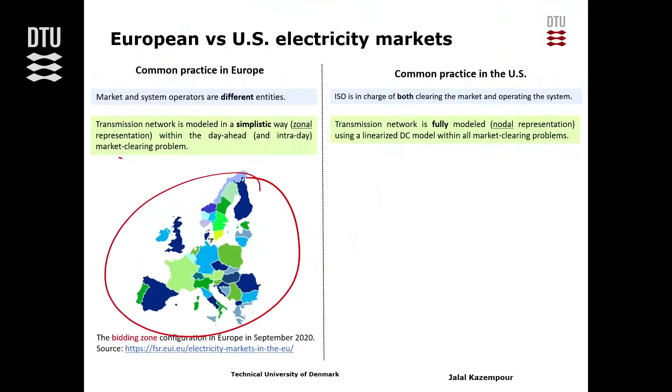So in Central Western Europe, including Germany and neighboring countries, we moved beyond ATC constraints. We try to represent the internal zonal transmission constraints within the zones through the flow-based method. And it's going to happen also in Nord Pool, in Nordic countries, starting from the coming January.

In Europe, since the ISO and TSO, market operator and TSO, are separate entities, the market operator clears the energy market day ahead, while TSO clears the ancillary service capacity market. They are separate markets. So in case of Nord Pool, at least in Denmark, first we have the ancillary service capacity market, and then the energy market.

While in the US, we have one system operator, the ISO. So we have a joint market clearing for energy and reserve. That's a very fundamental difference.

Which one is more optimal? Not more - which one is optimal, which one is suboptimal? Depends. US is optimal in that case, because you make decisions at the same time.

Some of you also mentioned bidding. So always we say that in Europe we have complex bids, simple market clearing. What does it mean? In US, the first problem we solve when we clear the market, what's that?

Unit commitment. What type? Security constrained unit commitment. So what type of optimization problem is it? Mixed integer linear programming. So you have binaries. If you have binaries, what kind of problems do you have? Challenging ones - you cannot derive dual variables.

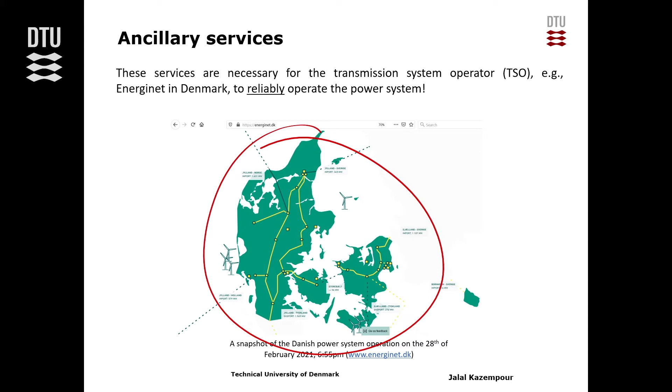So I said that who is clearing ancillary service markets in Europe? TSO, not Nord Pool, not market operators. For example, this is the balancing stage in Denmark that I captured from the Energinet website. So when we say ancillary services, what kind do we have?

So for what purposes do we have ancillary services? What type of services? Frequency-related ancillary services, exactly. Do we have only one type supporting frequency? We have 3. So what are they? Primary, secondary, tertiary, very good.

So then what other types of ancillary services do we have? Those services supporting voltage, and others? And else? Black start, yes. But you were talking about other things yesterday - what was that?

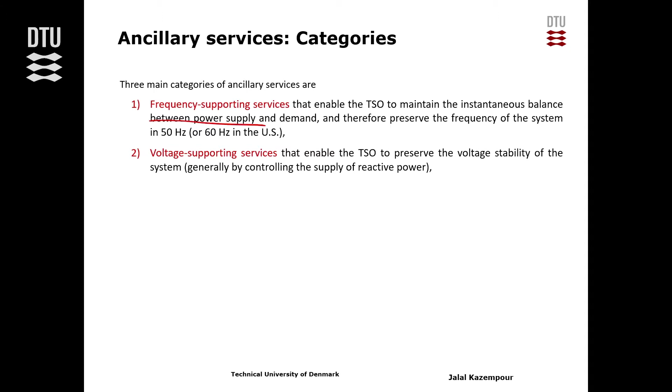Flexibility, ramping products, for instance. Yeah, but there's one more extra type of ancillary service that we need more of, by getting more and more wind and phasing out conventionals. Inertia - we need inertia, we need to have inertia markets. All of them are ancillary service markets, right? Very good. So we talked about frequency, voltage-related services, and black start.

So I've only talked about frequency-related services. When we talk about flexibility services, is it the same as ancillary services or not? They could be different.

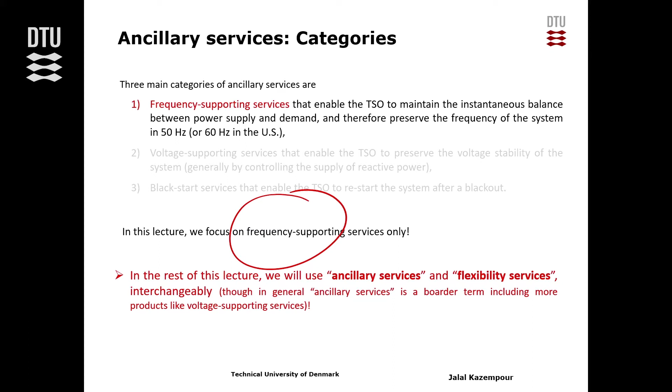So why do we do that? At the end of the day, we try to collect them and make them flexibility services and sell them to the TSO. Otherwise there's no reason to work on demand response, local energy systems, or energy communities. One of the big reasons is to capture and produce the flexibility services that we need.

So we are going to produce flexibility services. The big client, not the only one, but the big client of flexibility services is TSOs. And TSO needs frequency-related services. What kind of services? Primary, secondary, tertiary. I'm going to talk a bit in the European context.

Let's say a disturbance happens and frequency drops. What do you do as a TSO? You start with the primary reserve. In Europe we call it FCR, Frequency Containment Reserve.

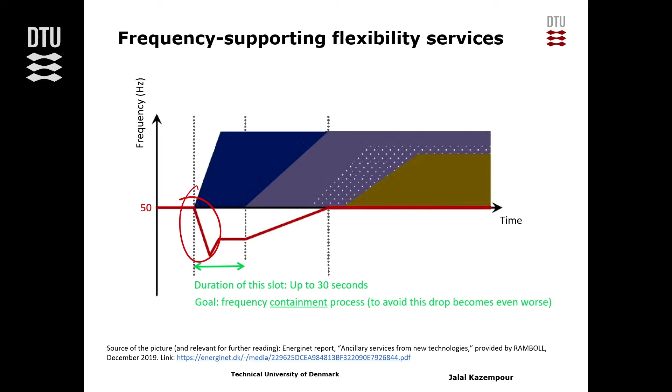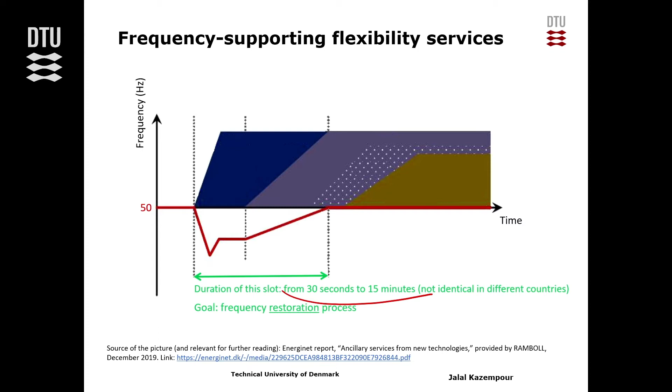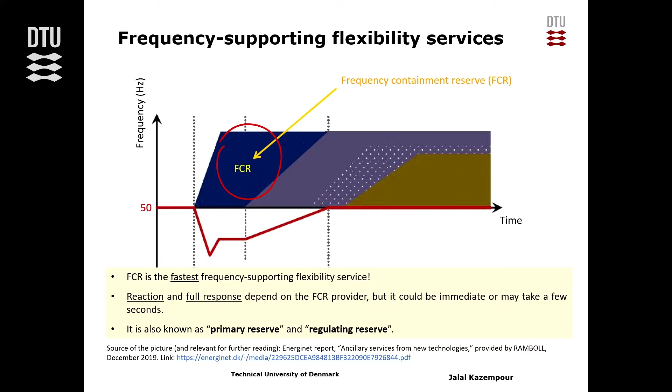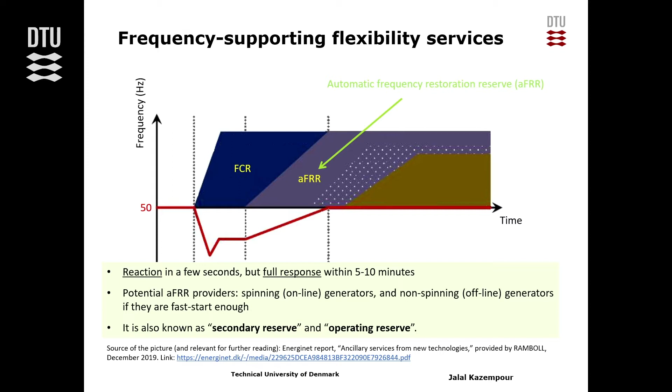Then it's AFRR, Automatic Frequency Restoration Reserve. It's slower than FCR, but it's the second line of our defending system against dropping frequency. And the third one is MFRR, which is way slower than FCR and AFRR.

So all of them help you restore frequency, but what makes them different is their speed - how fast they're activated and start working. FCR is super, super fast, while for MFRR, after you activate them, they start working after 30 minutes. So which one is more pricey, you can imagine?

FCR - you can imagine in the FCR market, the prices are higher. MFRR has a lower price. You can go on the Energinet website and check the prices. In terms of volume - the amount, the quantity that you trade in those markets - we have the FCR market, AFRR not necessarily markets yet, they are mostly bilateral, and MFRR we have markets. So in terms of quantity, which one has more?

By volume, you mean energy or capacity? Yeah, energy and the capacity also. AFRR - MFRR has way more capacity to trade.

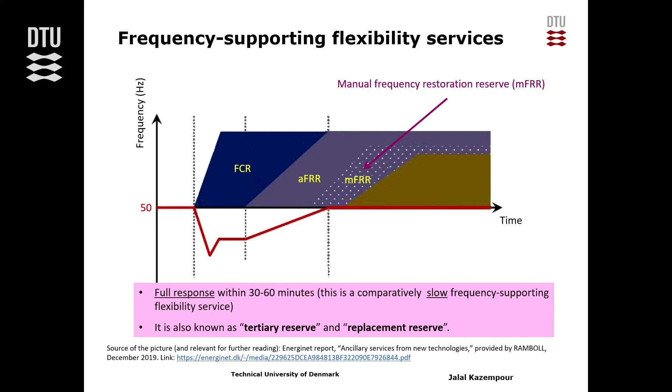Okay, so we talked about different markets. Let me check the time - this should be a preliminary talk. Now something specific about ancillary services in Denmark: we have two zones, DK1 and DK2.

DK1 is Jutland, the other side of Denmark. Here we are in DK2. And apparently we have different types of ancillary services in DK1 and DK2. In DK2 we have more types of ancillary services. Any idea why?

It's a less robust system. They are connected - so why? The whole European system is connected. They are not synchronous. They are connected, not necessarily synchronous. What does that mean?

DK2, which is here, is connected to the Nordic system. It's a smaller system and less stable, so you need more types of frequency ancillary services. While DK1 is connected to continental Europe, and you can imagine it's more stable.

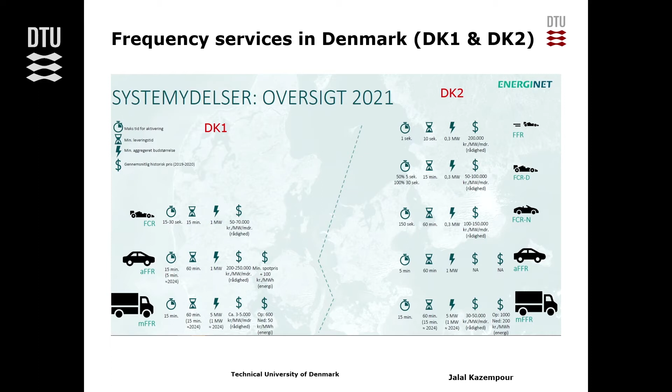You heard about market coupling in Europe, right? We have a common day-ahead market in Europe. Is it happening for ancillary services as well? Have you heard of that? No? Yes? So what's happening in Europe?

There are some incentives to build common ancillary service markets as well, the same for the whole Europe, pan-European markets. Why? Frequency is unique. If you have the same frequency products, you can sell between countries. It's way more than electricity. Why do you like to merge markets?

To have better allocation of resources. Imagine, for example, in Denmark you need some ancillary services, and in Germany we have it, and it's cheaper, but since they are not in the same market, we don't have access to them. So let's have a joint bigger market for better resource allocation, right? And that's what's happening. In day-ahead market, it happened in Europe. Now for balancing services, for flexible ancillary services, it's happening too.

So now we are going to have the Picasso market. It's an exchange platform for aFRR. And then also we are going to have the Mari market, a shared pan-European market for mFRR. So some stuff is happening. A few months ago, the Nordic countries, including Denmark, started a shared ancillary service market called the Nordic Balancing Model, NBM. And then the next stage is to join Mari and Picasso. Okay? Good.

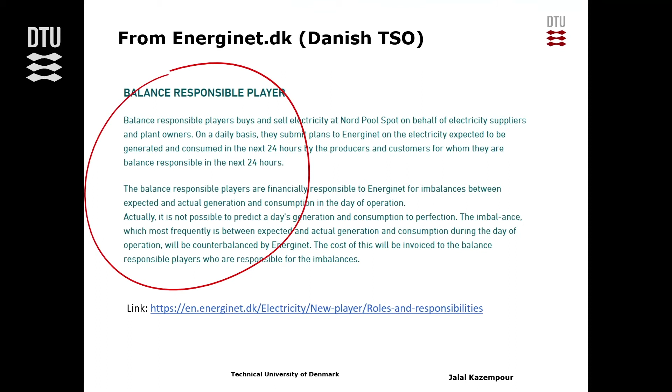Good. The definition of BRP on the Energinet website, we can go and check it out. Okay, aggregator. What is an aggregator?

Half of the posters downstairs are about energy communities or about demand response. Flora, you talked about demand response to us. So who is doing that? Who is collecting all flexibility services? Aggregator, flexibility aggregator, right? Is a flexibility aggregator a profit seeker? Should not be. So what does an aggregator do?

An aggregator - it's like a TSO. It collects smaller resources. Is any of you working with aggregators in your PhD projects? Yeah? Okay, what does an aggregator do? It just pools little pieces of flexibility together in order to be comparable to a conventional generator, and tries to produce and give products in the market.

Good. What kind of game are they playing? Like the games we played in our childhood - Tetris. There are small pieces of flexibility that they can get from heat pumps, from EVs, from thermostatically controlled loads, and then they put these small pieces together to build what? A big amount of flexibility services, but in different forms - FCR, mFRR mostly, right? They are trying to do that.

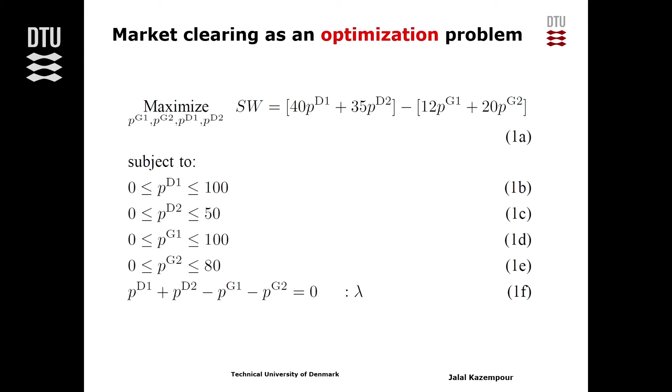I start from here because at the end of this part 2, I like to end up with the properties in market design that you have to be very careful about. That's why we are starting with this simple example. So we are trying to maximize social welfare, which is the utility of demands minus the cost of generators. And then we have consumption limits, generation limits, and power balance equality.

And here there is no network. What is the lambda? It's the dual variable. If you use uniform pricing, it gives you what? The price. Okay, very fast question: what is the dual variable?

Price - I know, mathematically here you define lambda to be your price. But what is dual variable if you talk with a mathematician? The sensitivity of the Lagrangian with respect to the generation. Oh, very good - sensitivity of the objective function, the Lagrangian, or on the right hand side. Simply you can say sensitivity of the objective function, the value of objective function with respect to any perturbation, any small change in that corresponding constraint at the optimal point.

And you can check the sensitivity on the right-hand side and left-hand side. You have to check both, not just the right-hand side. So this is exactly the case that the prices might be different. If the right-hand side sensitivity and left-hand side sensitivity are different, you may have multiple prices. But you have a unique price if the left-hand and right-hand side sensitivities are exactly the same.

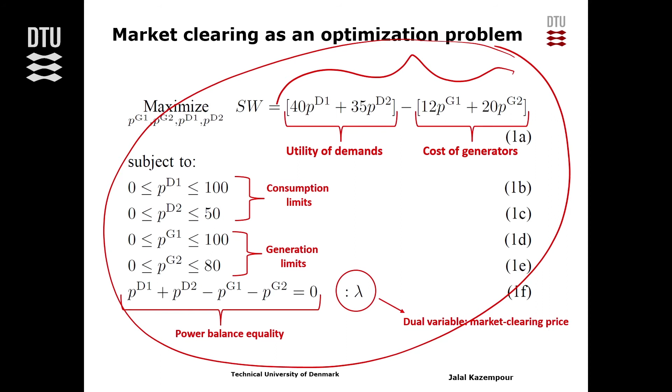Maybe given the price, the optimization problem for each generator yields the optimal solution. Fantastic, you have to make sure - this is the price I'm paying, $20 per megawatt hour. If they optimize internally and their solution is different than the market outcome, they will definitely deviate, at least in the long run. Okay very good, so Ogun, you said something good, so I'm passing this.

So this is what Ogun said - this is the profit maximization problem for each generator. What's the variable? The variable is the internal power dispatch level. And what's the lambda? The lambda is the announced system lambda. Is lambda a variable for the generator? No. So we are trying to see, for fixed lambda, what will be the best profit-maximizing schedule for generator G1. Do you agree?

So what is the objective function? Production times lambda price, minus the cost. So it's the profit, right? And the only internal constraint is the limit, the capacity limit. You agree? Okay, so can you think of the same for generator G2?

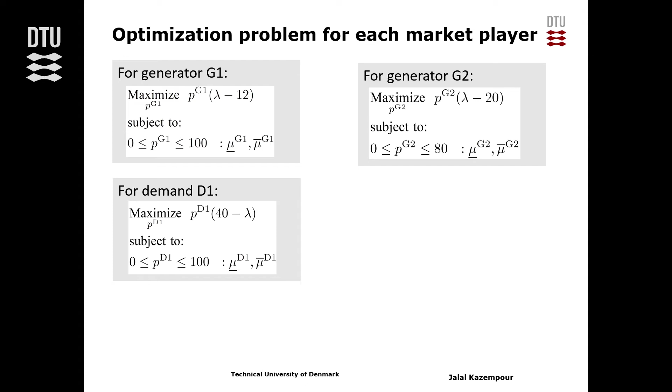And you can think of the same from the demand side. What does demand try to do? Maximize utility or surplus. What's the surplus for demand? If we have the demand and supply curve and find the intersection, whatever is above price between the two areas is the surplus for consumers. So here, she is buying PD1. 40 is the value of electricity for her, and lambda is what she's going to pay. So 40 minus lambda times P is the value of electricity for demand. It's the surplus, right? So this is for D1 and D2.

Are we missing something compared to the optimization problem? Power balance. Okay, now we have power balance. Now we have 5 pieces. The first 4 boxes are optimization. The last one is a constraint. Can you give me a mathematical trick to also make it optimization?

Maybe I'd like to get lambda also. No, I don't like to have a dummy objective saying maximize one subject to this. Tell me something so that lambda is also a part of the play. Okay, derive an optimization, or develop an optimization. Whose KKT is this? Lambda times... Very good. Exactly. Very good.

You can have that: minimize over lambda, and in that unconstrained optimization problem, lambda is the variable times the power balance equality. So if you derive the KKT, what will be your KKT? You derive the stationary condition, which is the derivative of the Lagrangian, and the Lagrangian here is exactly the same as the objective function because you don't have any constraint. So with respect to lambda, it will be exactly the power balance equality. You accept? You buy it?

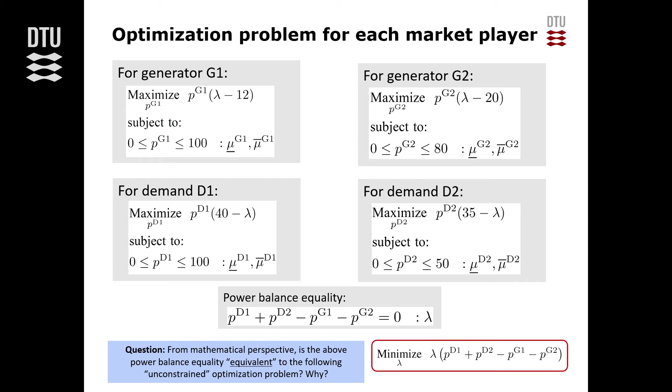Good, thank you. Good, now we have these 5 optimization problems. And the last one, I call it price setter. I didn't - actually, Arrow and Debreu did. In 1952, they called it a fictitious player called price setter. Actually, they called it something else, but let's call it price setter. I don't remember what they called it.

But now we have 5 optimization problems, right? Each representing one agent. Can we solve them separately? Who says yes? Who says no? The others are neutral - you don't care about solving that. Why do you ask that? Why can't we solve them separately? Who is saying that, Nick?

They have a common resource - they have lambda in all of them. In G1, G2, D1, D2, is lambda a variable or parameter? Parameter. Thank you. In the last one, price setter, is lambda a variable or parameter? Variable. Okay, in price setter, the 4 variables D1, D2, G1, G2 - are they variables or parameters? Parameter. In the other 4, are they variables or parameters? Variable. Can you solve them separately? No. Thank you. No, can't. We can't solve them separately. So what to do?

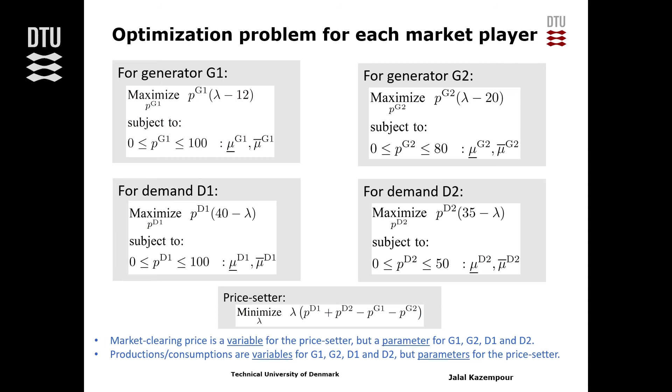This is an equilibrium problem. It's a game theoretic problem. Is it a cooperative game or non-cooperative game? Non-cooperative game - everyone tries to maximize her own payoff. True? Good. Okay, we need to solve all of them together. This is a game theoretic problem, and in economics, it's called competitive equilibrium.

Do you know when this problem was invented? Any idea? A long time ago. Yeah, it was Kantorovich in 1939 - he was the first one, I think. He talked about that competitive equilibrium. Then it was Paul Samuelson in 1952, I guess. And then Arrow and Debreu - they are very famous people, they worked on that. All of them got the Nobel Prize.

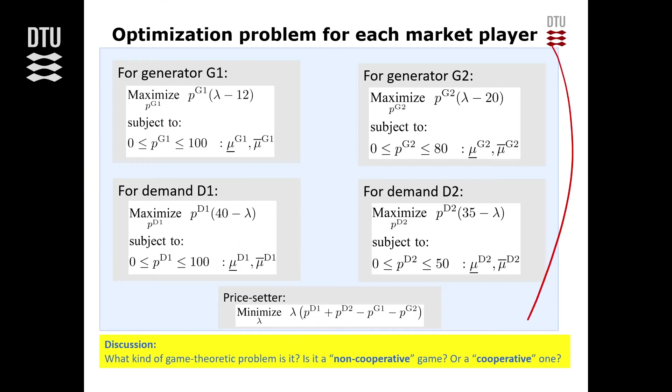Good. I like to be fast here. You saw that now we have an equilibrium problem. Everyone maximizes their own profit, whatever. Also, we have a price setter optimization problem. In the beginning, I showed that we can have an optimization problem where we are maximizing profit. That's one optimization problem, while in equilibrium we have a set of optimizations that are linked. You are designing a market - which one do you prefer?

Are they the same or not? Who says they are the same? You are designing a market, you have two choices. You can develop the optimization problem, the one on the right: you maximize social welfare subject to all constraints, including consumption limits, production limits, power balance. That's choice number one, we call it the optimization choice. When we clear the day-ahead market, whatever, everywhere, we are solving that.

The other one is equilibrium. With that, we're sure everyone is happy, because we are going to find a Nash equilibrium point - everyone tries to maximize their own payoff, including the price setter. Now you are the one consulting Nord Pool, and Nord Pool asks you, okay, I'd like to clear the market, how should I do that? Are you suggesting the equilibrium choice or the optimization choice?

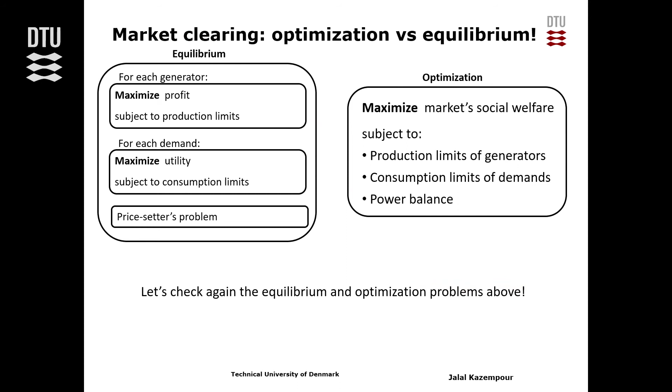How can you solve that, by the way? You have a system of equations, how do you solve it? And it's nonlinear because you have complementarities. How do you solve it? Remember from Tuesday?

You can go with the monotone inclusion trick. You can make it monotone, and you can solve it iteratively, right? But we don't do that, we use solvers, because those solvers do that for us. We don't care what they do behind the scenes, but this is what they do.

Which solver do we use? Path, for example. I don't know if there are other solvers, to be honest, but Path is the more typical solver you use for MCPs. Or we ask Sergio to come and write a program, a code for us, and we do that.

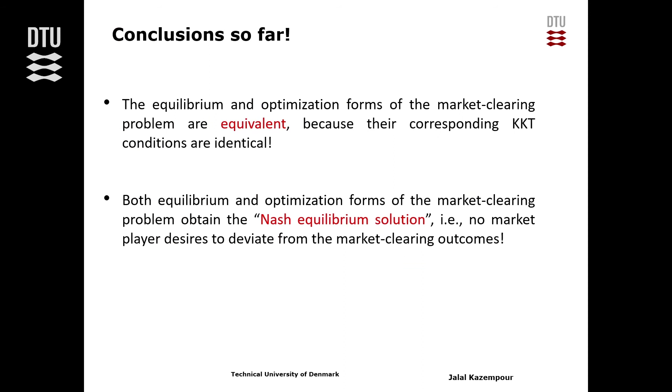If you also derive the KKTs of the centralized optimization, you will see they are exactly the same. So when you clear the market, you can write it as an optimization problem, maximizing social welfare. Do that, it's easy, you can solve it with easy LP solvers like Gurobi, Simplex, many others. Or what is the simplest LP algorithm to solve, that you can do by hand? Simplex. You can use Simplex and solve it and find the bounds.

You don't need to solve the MCP. But the beauty is that this is equivalent to an equilibrium, so no one will deviate. We love it. So when you design a market for anything, make sure there is an equilibrium behind it, and ideally a single unique solution for that.

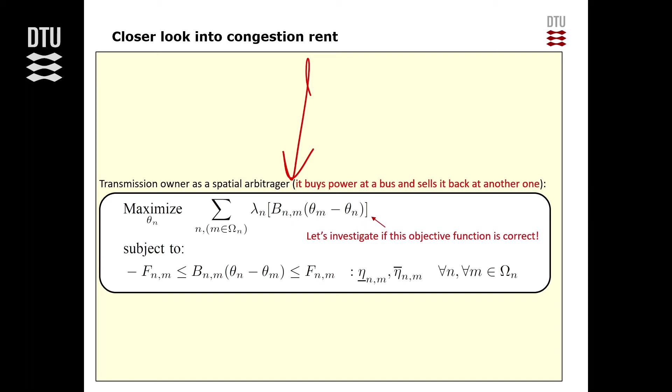So who is it representing? The transmission system operator. Maximizing what? Congestion rent, subject to transmission capacity. Right? Okay, I'd like to be a bit fast here. But we really don't like to have transmission system operators trying to earn money based on congestion rents. It looks a bit weird.

We like to facilitate the network, whatever. So in Europe and US, again, we have different concepts. In Europe, yeah, transmission system operators like Energinet or others—first of all, there is a zonal setup. So the only congestion rent that happens is between the zones, because within the zones there is no congestion. So your congestion rent only comes from the capacity between the zones. And actually they collect the congestion rents, and I don't know, every quarter, something like that, they proportionally split congestion rent among the TSOs, like Energinet. And then Energinet uses that for grid expansion or lowers the grid tariffs. That's how we do in Europe.

But in US, there's a different story. What's that? FTRs. So you have to read papers by Hung-po Chao, by Bill Hogan, others, in 1990 or '85, something like that. What is FTR? Financial transmission rights.

Let's say that we have a generator here, a demand here, so we have a flow something like that, right? And then here the price is, let's say, lambda 2. Here the price is lambda 1. And the flow is F. Let's say that this is congested now. So we are going to have a congestion rent of lambda 1 minus lambda 2 times F. This is what the transmission system owner gains.

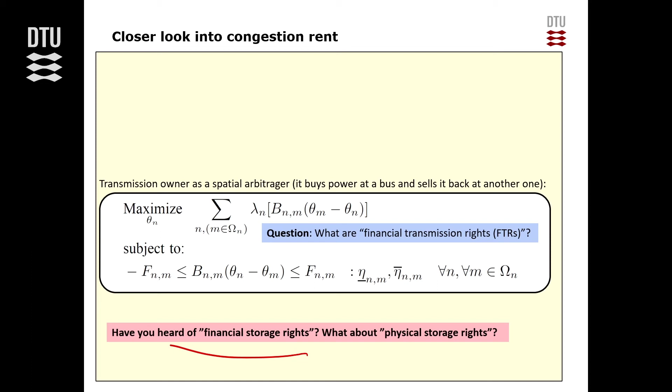This is financial, right? So I told you that the transmission system owner, at the end of the day, is an arbitrator, a spatial arbitrator. We can also think of a temporal arbitrator, which is who? Storage. Can we think of financial storage rights? Yes. So read papers of Eilyan Bitar, Josh Taylor, et al. It's about, also we have something similar for temporal arbitrators, for financial storage right. What about physical rights?

Can you differentiate between financial rights and physical rights? How, Nick? I have an asset, this. It's useful in power system. I can sell financial rights and physical rights to you, Nick. If I sell financial rights to you, what does it mean? If I sell physical rights to you, what does it mean? This unit generates profit and owns some part of it. Very good. That's the financial.

In the financial part, this asset is being used by the market operator, the system operator. It's not me, it's not the right holder who schedules that. It's the system operator who schedules this asset, uses this asset for the sake of the whole system, for social welfare maximization. And if we get any profit out of that, the right holder will get the share. But what is the physical right? Is this what the system operator gets? Not anymore. It's the right holder who decides about the schedule, the use of this asset.

For example, if this is a battery, Nick says that I have 50% physical right. I decide to use this 50% like this at the next hour. So you schedule the asset, you rent the asset, and use it as you wish. But to get the physical right for the asset, you have to compete with others, right? So one potential PhD topic, right? Yes, please, Mert. Do you have to use the entire capacity if I get it? Is it mandatory? No, you are just booking the capacity.

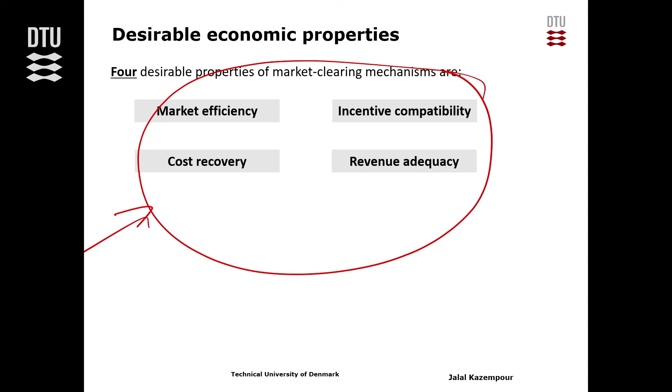It's very common that we use LMP-based markets, based on dual variables. First of all, there is something called the impossibility theorem. What does it mean? Have you heard of the impossibility theorem?

Unfortunately, there is a conflict of interest between these four properties. You cannot have all of them at once. So as a market designer, you have to decide which property you like to pick and which one you give up. There's no way to have all of them at once. That's bad news. So you can read about the impossibility theorem.

So, uniform pricing, those with dual variables. Do you know which properties you have and which you gave up? Efficiency: is everyone happy? Yeah, I agree. Incentive compatibility: is there any chance for people to lie, behave strategically, and bid at a higher price?

Yes, with uniform pricing, people can lie and behave strategically. Then if people behave strategically, it means social welfare is being compromised, so in that sense we are not efficient either. People are happy, but only for given bids that might be strategic. It doesn't mean social welfare is maximized, because people are not necessarily truthful.

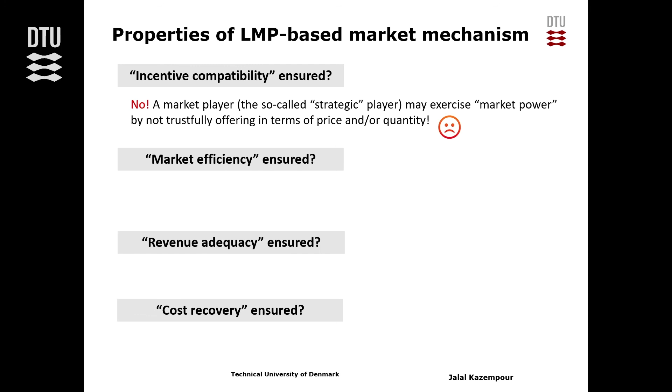But why do we like that? Why is uniform pricing so common? Because we have cost recovery and revenue adequacy. In my course, I ask people to sit and mathematically prove why uniform pricing guarantees revenue adequacy and cost recovery. To do that, you need to know how to derive the dual optimization, and so forth.

Quick question: you have cost recovery for the optimization problem you described, right? Because in the case of unit commitment, as described, there's none. Very good question. Yeah, I eliminated that part from my slide. In the optimization problem I showed you, there was no unit commitment problem. I cheated, and then I said that in this optimization problem we had cost recovery and revenue adequacy.

But when you add the unit commitment constraint, as we talked about, when you fix the binaries, startup cost and fixed cost are all removed, and the uniform price doesn't reflect them. Then again, the cost recovery is gone.

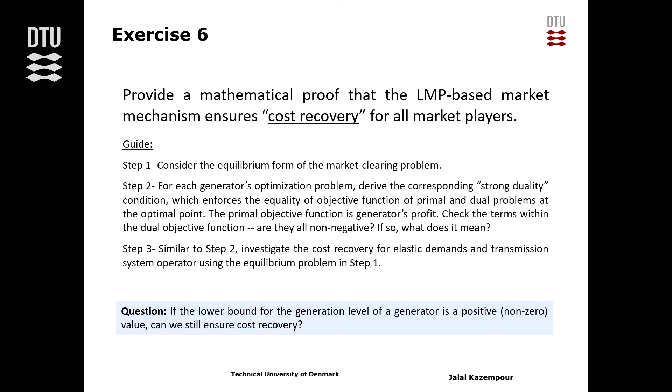So uniform pricing, you might think it's not that amazing a mechanism, but we don't have any other option. We have VCG, Vickrey-Clarke-Groves, the three genius gentlemen who also got the Nobel Prize, and they proved something incentive compatible, which is efficient, but not revenue adequate. But electricity markets decided not to use VCG yet. Maybe they will. Good, this is the end of my part 2. I have half an hour for part 3. Any questions?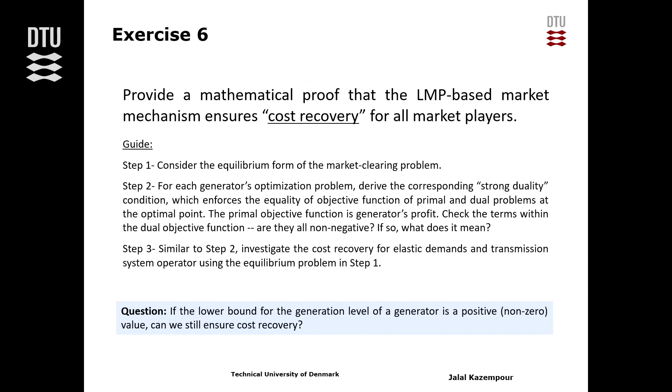Good. Part 3. This is the most applied part with less basics or fundamentals. 130 slides, 20 minutes left, so obviously it will not work out. But I knew that, I put the slides there because you can read them offline, and hopefully it will trigger your mind to have some idea.

So in 20 minutes, I'll try to focus on the most important part, which is about integrated energy systems. When we say integrated energy systems, what do you think of? For example, different energy sectors: power, natural gas, district heating. Maybe in future we will have a system network for hydrogen, who knows?

Also now the power system is being connected to transportation, right? When we talk about integrated energy systems, it's also about coupling sectors. And sectors are not necessarily just different energy carriers. For example, TSO and DSO are two different sectors, and they are coupled, and we need coordination between them, as we discussed.

And why do you think market design could be challenging for integrated energy systems? Do you see any challenge about market design? For example, let's pick power and gas systems. They are coupled through gas-fired power plants, or power and heat systems, coupled through heat pumps, combined heat and power plants, and so forth. So do you see any challenge in terms of market design for them?

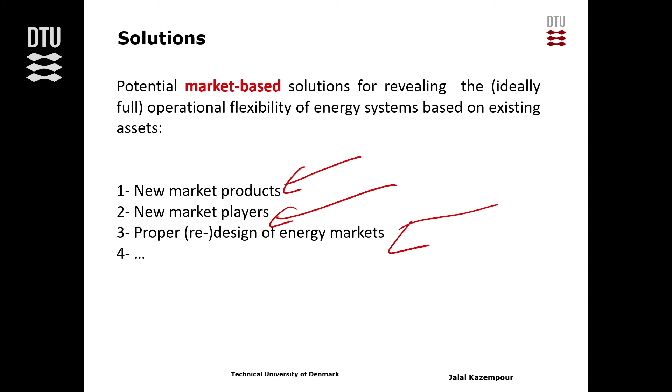Am I clear? Good. I'm going to skip some slides. New market products, new players—first think of that, and if they don't work, think of redesigning the markets, but not co-optimization. It will not work out, I think. Okay? Good.

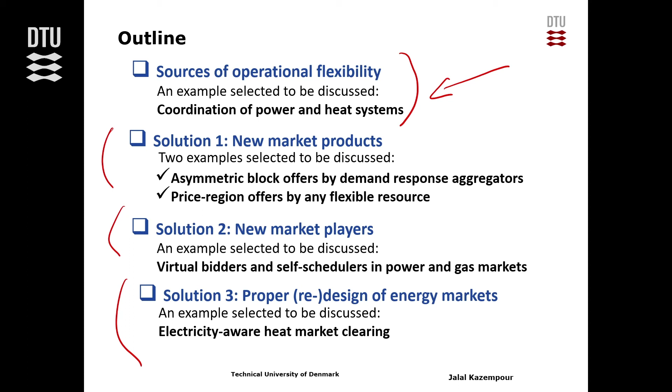I have in the slides some challenges and examples for market products, market players, and how we can redesign markets while accepting they are cleared independently. I won't go through these three solutions, but hopefully the slides are clear enough for you to check offline, and you can always contact me with good ideas. I'd like to talk about at least the first one in the remaining 14 minutes.

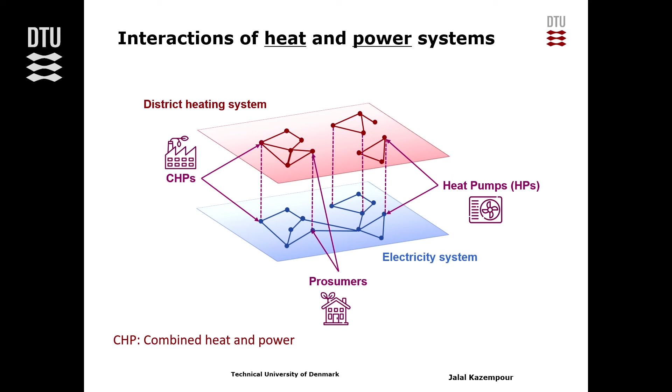For example, district heating and electricity systems, as I said, are connected by CHPs—combined heat and power plants—by heat pumps, by prosumers, and others.

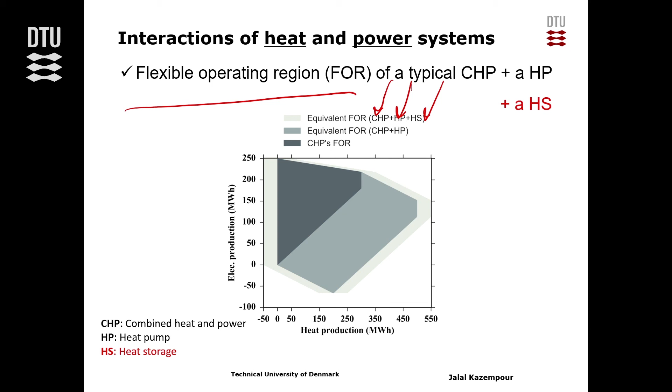For example, if you have a CHP, heat pump, and heat storage, you have this feasible operating region—this is heat production, and this is electricity production. In Copenhagen, we first clear the heat market, so we say the CHPs and heat pumps are going to first produce 150 megawatts heat. First we clear the heat market, then in the next stage you clear electricity in the power system. This is the range of P min to P max that your assets can produce power.

But they are restricted by your a priori heat dispatch. So when you clear the heat market, if you know your heat schedule will create restrictions later in the power market, and you'd like to favor total social welfare, instead of scheduling heat to produce 350, maybe you schedule heat for 150. Why? Because if you schedule heat here, you have less flexibility in how much power you can produce later.

So there are nice ideas for how to make heat markets electricity-aware, or electricity markets gas-aware. For example, there's a nice paper by the group of Pascal Van Hentenryck at Georgia Tech, saying that in the US, the gas market is cleared after the power market. So let's make the power/electricity market gas-aware in a way that maximizes social welfare for power and gas both at the same time, while keeping those two markets separate.

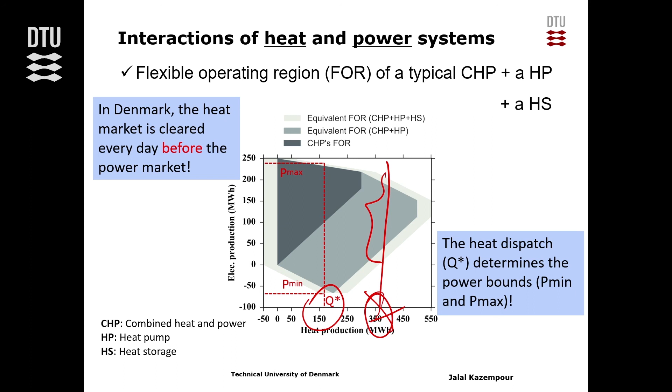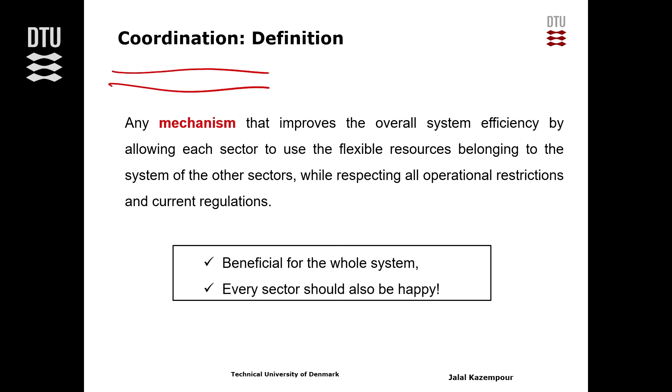Good. So we need coordination between the sectors. For me, coordination means any mechanism that respects the sectors being independent, working separately, while still trying to increase the information exchange between the sectors so that, at the end of the day, you increase the total social welfare. If you have that kind of mechanism, you can say you now have a coordination mechanism. Am I clear?

For example, there are some nice papers, like between TSO and DSO, you can think of operational coordination mechanisms. There's a nice paper that says first let's make sure DSO will tell TSO what is the feasible space of DSO in terms of active and reactive power, and then TSO will clear the market afterwards. That's one way.

Or financial instruments. Or there's a wonderful paper which is not about power, but about local information channels. So for example, saying that we are 50 people here, every one of us maximizing our own optimization, and we have different understanding about, for example, common sources of uncertainty.

You can prove that if all of us have a common understanding of uncertainty, and if we improve our understanding about uncertainty, it's good for the whole social welfare. It doesn't mean that it's necessarily profitable for every single individual. So the paper says let's think of local information channels. Maybe, I don't know, Farad and some others, we can have a local information channel, share our information to improve our forecast, to improve our understanding, and then it will be good for the whole system, right?

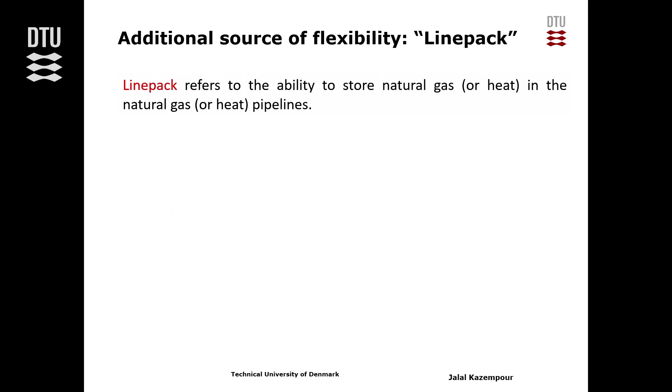Good. I'd like to give you some thoughts for your PhD thesis, and then I'll finish.

One big issue when you would like to coordinate systems is to understand their physics. Especially when we think of flexibility products, it's very important to understand the physics of new assets we have, like electrolyzers, or how gas is flowing in the networks, or heat. It's very important to have good modeling of the physics of the system in the market clearing problem. In power systems, we learned about DC power flow.

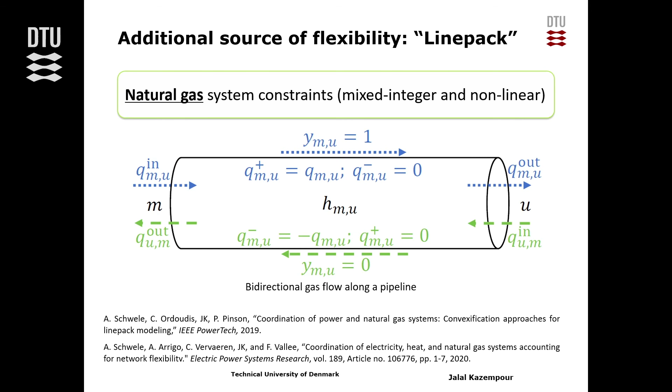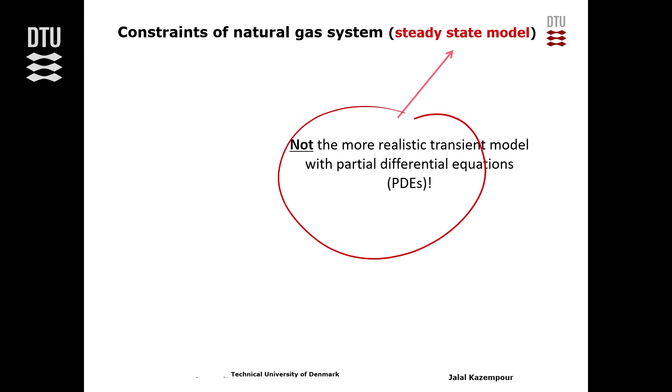Okay, it works okay, but in gas or in heat, it's not that easy. Even if we do a lot of approximations, for example in the gas system, the gas flow in networks, if you'd like to really model it, you have to use partial differential equations. You do some approximations and simplifications that Yannick and Erika can explain better than me, and then you end up with this optimization problem with this constraint, which you can think of as like a DC approximation, but for gas.

But when we have DC approximation in the power system, it's linear, we are happy. What about this constraint? Is it linear? Is it convex? Q is a flow, a variable, and PR is pressure, nodal pressures. Is it a convex constraint? No. As long as you have nonlinear equality, it's non-convex, done.

Okay, you did a lot of simplifications and you end up again with a non-convex model. If you'd like to understand the physics of the gas and put it in your market model, you're stuck with a non-convex model. And I don't think I need to convince you why we don't like to have a non-convex problem, right? Because of suboptimality, because we cannot interpret the prices, and so on.

So you will stick to, okay, let's do approximation, let's do relaxation. There are many, many papers about that, about how to approximate this, how to relax this. But still we don't have any concrete rigorous model that we can use to linearize this constraint called the Weymouth equation.

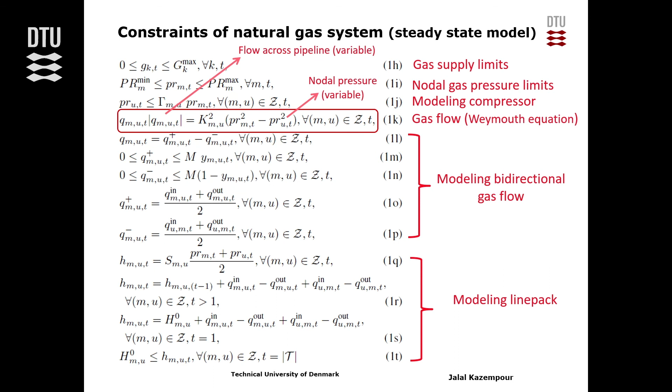Right? The last thing I'd like to mention, and then I'm going to conclude, is this.

Okay, you told me that we are connecting sectors like power, gas, heat. Why? To get more flexibility, right? So we are getting flexibility from the gas sector. How? For example, by storing gas in the pipelines, what we call linepack. Good, happy, we are getting more flexibility by sector coupling.

But is there any challenge? Are we putting, for example, the gas sector in some critical situation?

Yeah, right. You're kind of forcing them to take that option, or you're kind of binding them to, or you're restricting their view.

Let's say that our power system has a lot of uncertain sources, wind, and now we are connecting our power system to the gas sector through gas-fired power plants. Gas-fired power plants are those who mostly compensate the uncertainty, the variability of wind. So what are you doing? Adding more uncertainty to gas. You are propagating uncertainty from power to gas, pushing uncertainty from power to gas. And you're saying to the gas sector, now it's your job to handle the uncertainty I'm imposing on you.